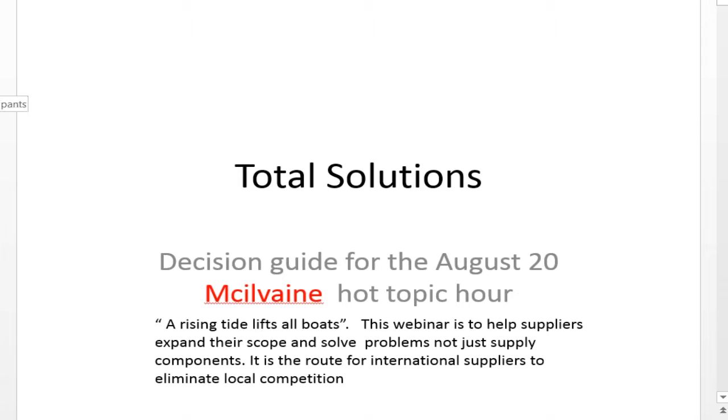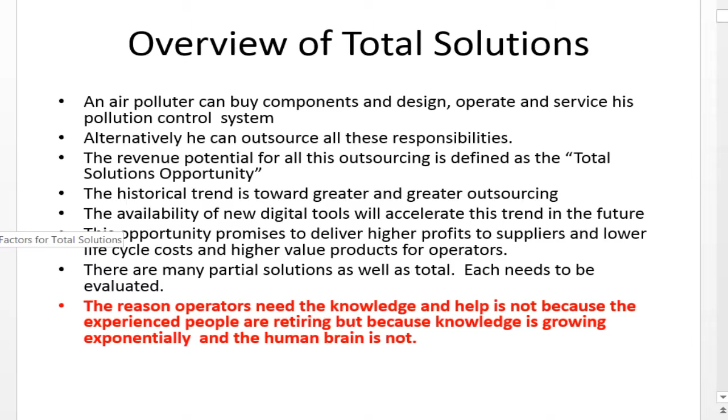Let's move on to the scope of the participants in the meeting today, which were a number of the suppliers and consultants in the field. This overview is available in various McIlvaine publications, including the power plant air quality decisions, the industrial air plants and projects, the scrubber and fabric filter market reports, and several others. So this short YouTube presentation is a short version of the actual 120-minute discussion, which has been recorded and is available along with the actual PowerPoint presentations that you're seeing here.

And there are many reasons that end users want more participation from the suppliers. Complex systems with multiple steps. So if you buy one component from one company and one from another, you may not get the combined results that you were seeking. Valuable products, and those are end products, but products along the way like refinery catalysts, challenging air permits, safety, health. Many of the air pollution systems now impact operations one way or another. There is a lack of skilled personnel within the plants.

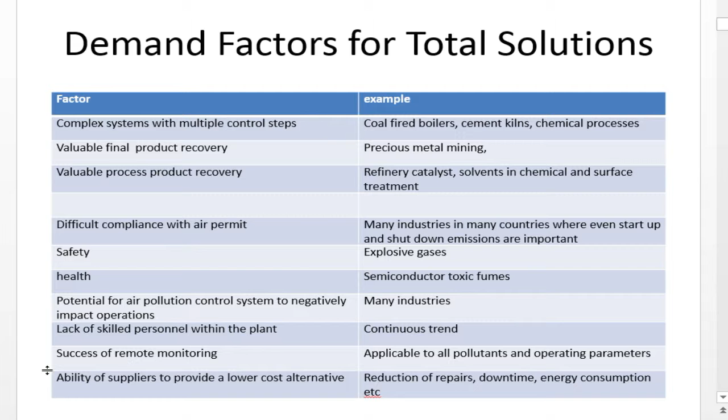Remote monitoring can allow the suppliers to create a lot of value to the end users at low cost. And the ability to even manipulate the repair parts and to provide the best repair parts in a particular area. So for instance, here Clarcor with Total Filtration Services can provide all the different filters that go into the plant and recommend improvements as well. And build, own, operate: one example would be providing systems that convert SO2 into ammonium sulfate fertilizer.

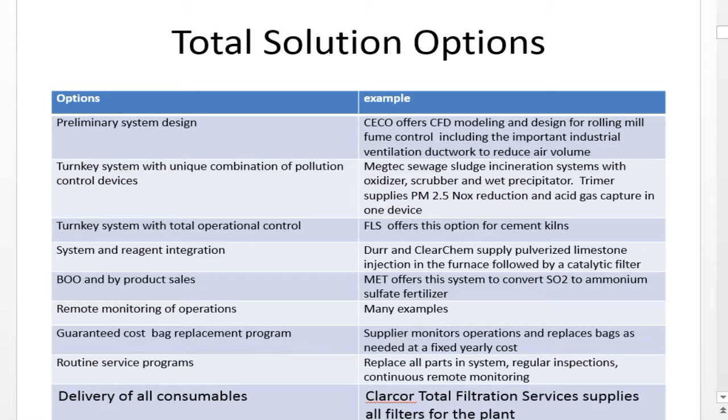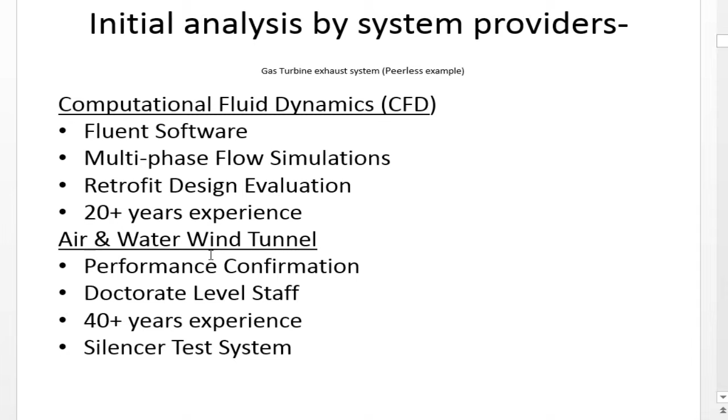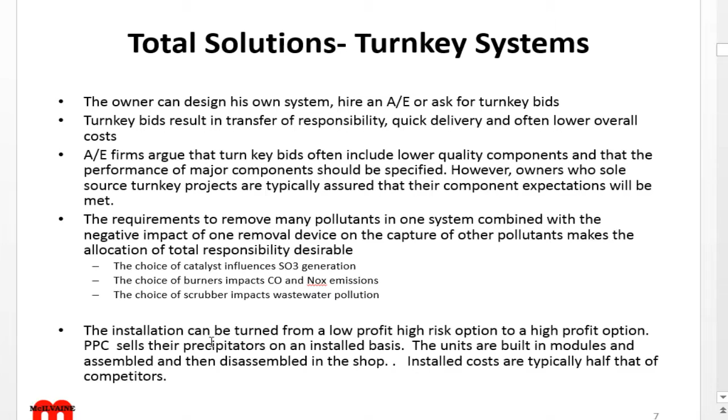A lot of the suppliers have the capability to analyze systems with air and water wind tunnels and other tools to make sure that the ultimate system which is installed has all the flow characteristics that are necessary. We can move on here, and for instance, one question is whether turnkey systems should be furnished by an EPC such as SNC-Lavalin or by the actual equipment suppliers. And in this particular case, SNC-Lavalin is also including the wastewater and a number of other pieces of equipment.

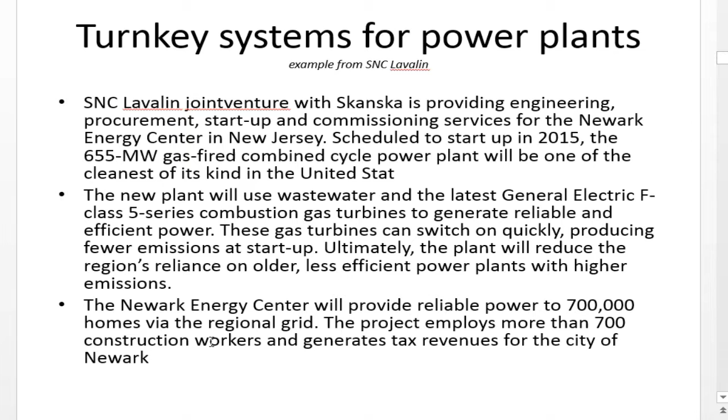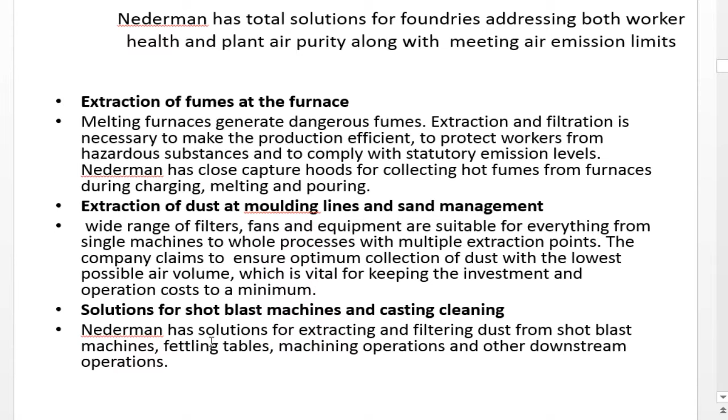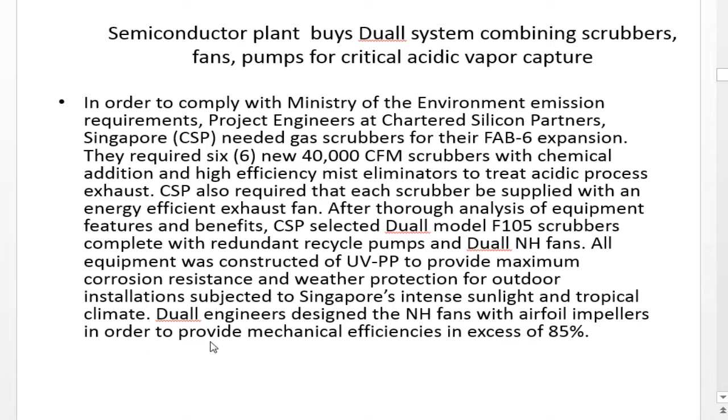It's important in many industries that the ventilation systems be married with the air pollution control, because a better job of extracting the minimum amount of air with the maximum amount of safety and health will translate into lower cost dust collection systems. The semiconductor industry is one example of where it's critical that the emissions be controlled for safety and health purposes.

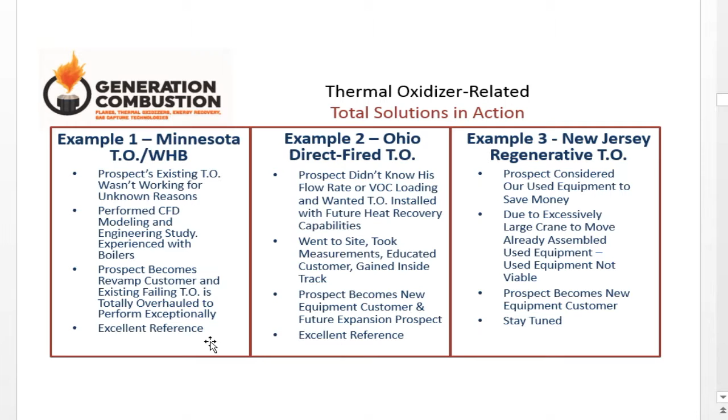Clark Griffiths, a consultant, explained all the different inputs that will be necessary for a successful installation, and suggests that even helping the customer determine whether to use used equipment or new equipment, trying to eliminate the use of excessively large cranes, etc., are all part of the potential. Mitsubishi and Air Products actually furnished a whole SO2 removal system on a build, own, operate basis, and the client only paid for the SO2 that was removed.

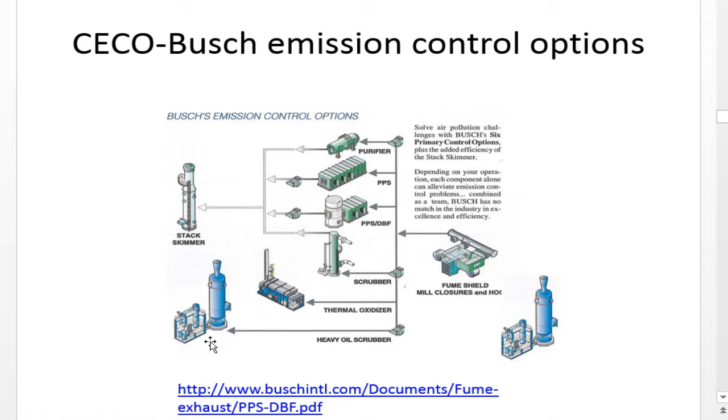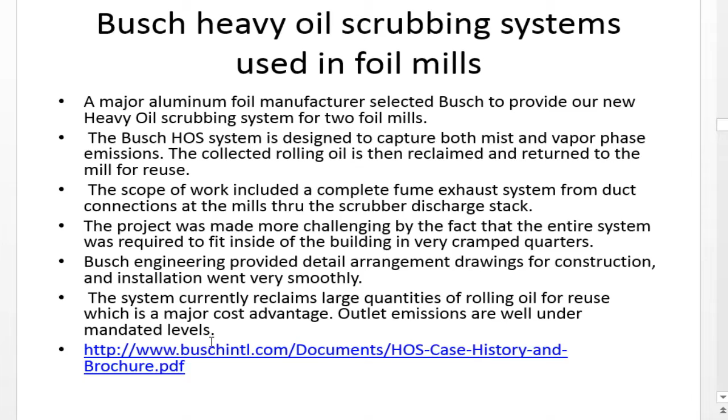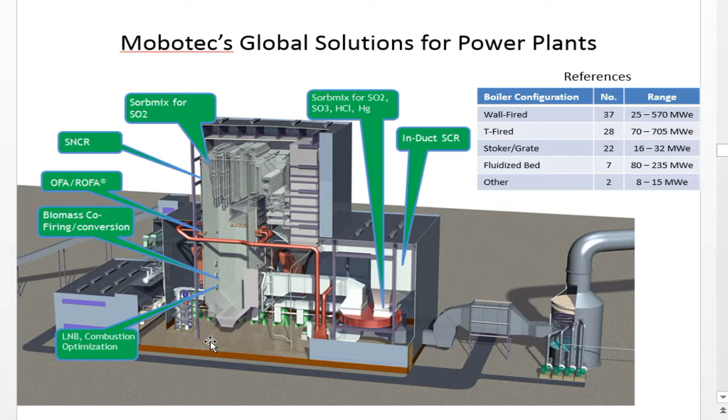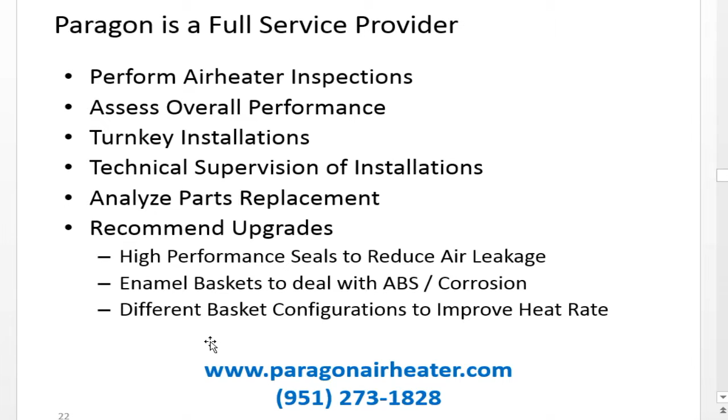Busch and MEGTEC have the options of providing systems that either combust the fumes or capture usable oils and solvents, and in some cases both give you the option at any point in time depending on the products that are being manufactured at the time. And Mobotec has the ability to optimize many of the in-furnace reactions that are going on and provide optimization there, and they can work with other suppliers. The air preheater is a critical device, and a lot of attention should be paid to that design.

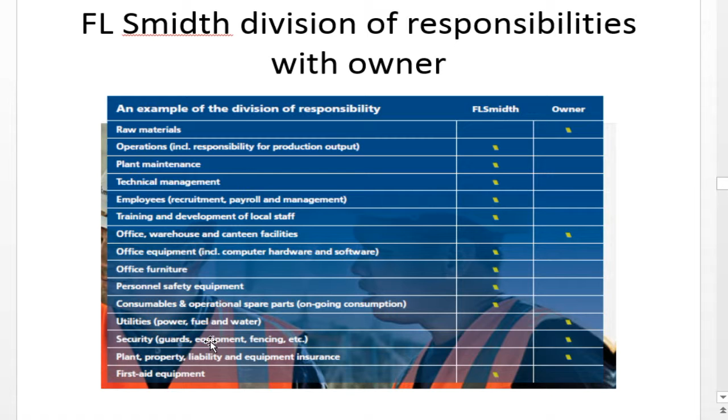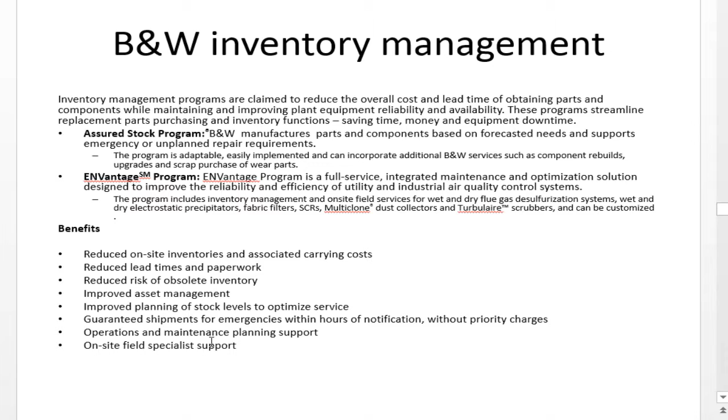FL Smidth builds, owns, and operates, so when it comes to operating plants, you can see here that even the first aid equipment is furnished by FLS in a cement plant, office furniture, so well beyond everything but the raw materials in the office and warehouse, and it can result in value to the customers. B&W is a good example of somebody who even furnishes the air pollution control equipment and can provide complete inventory management.

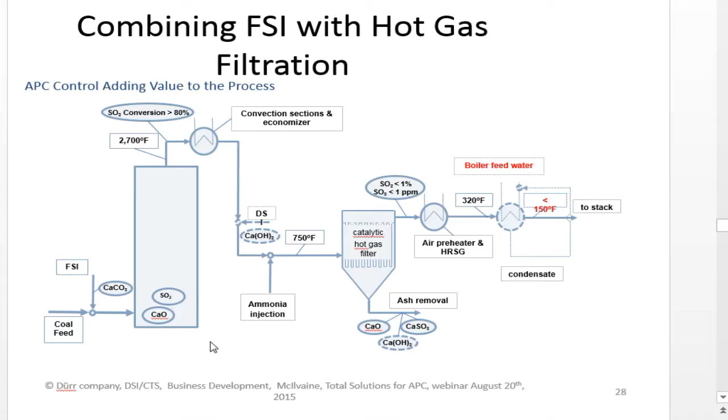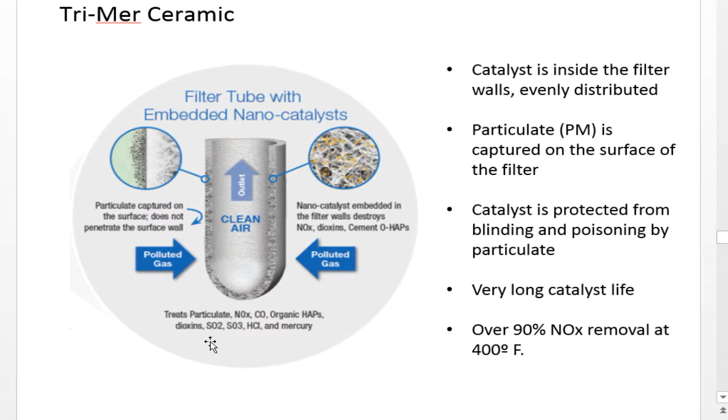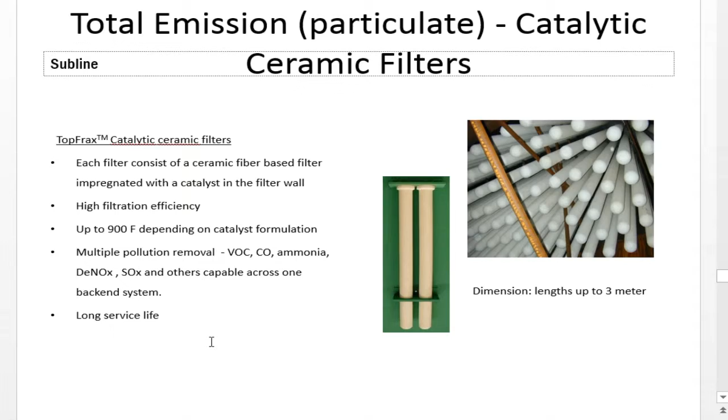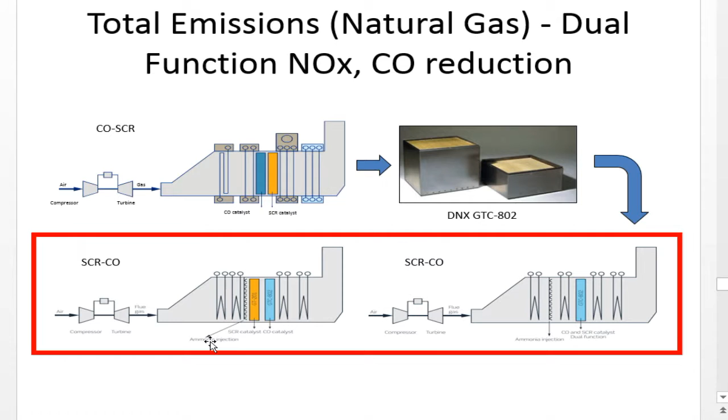Durr has a number of total solutions, including one where they use a unique powdered limestone sorbent, catalytic filters, air heat exchangers, and condensate capture to optimize the air pollution, the energy, and the byproduct recovery. Tri-Mer is another example, and both Tri-Mer and Durr are using these new catalytic filters. One of the suppliers of these catalytic filters is Haldor Topsoe, and both Haldor Topsoe and ClearEdge are producing catalytic filter elements that may last as long as 5 years or more. In both cases, you have options of not only removing NOx, but also VOCs and even CO.

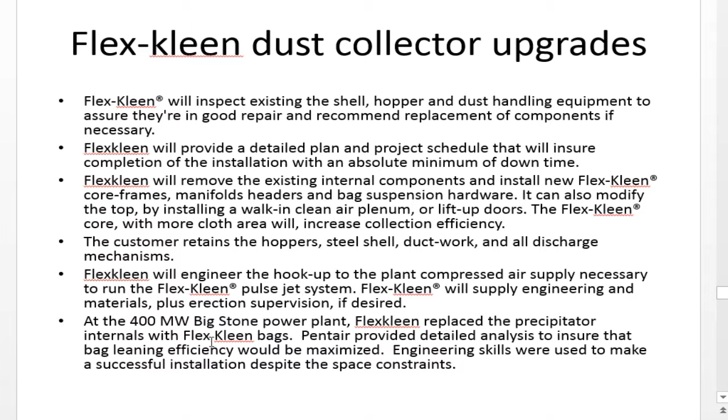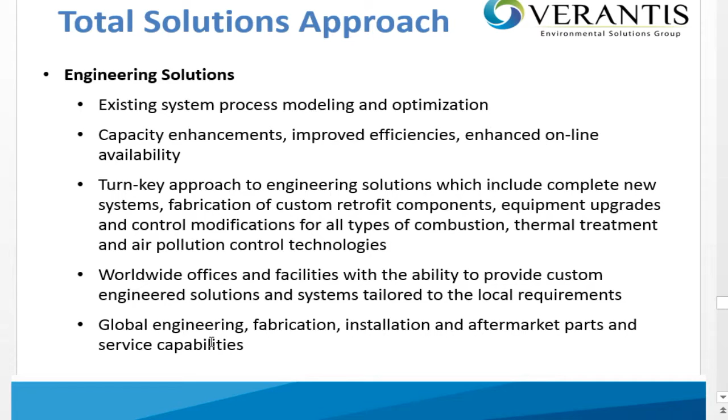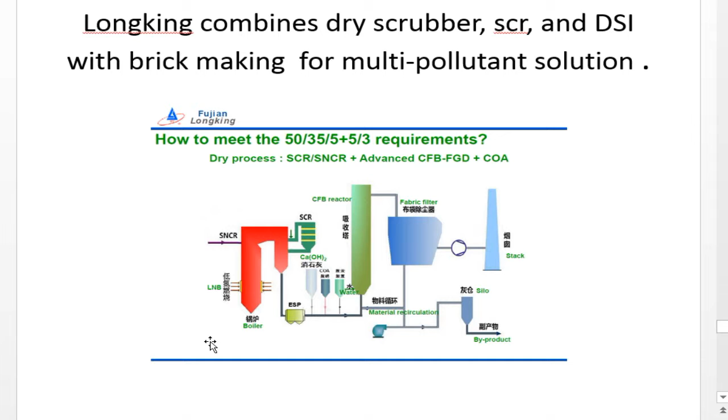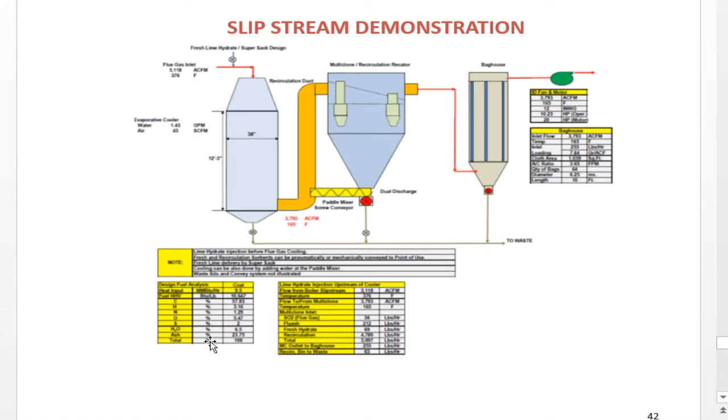Flex-kleen is one of the suppliers who can upgrade bag houses. Process optimization is something that is being offered by a number of companies. Verantis has zero liquid discharge systems and even product recovery with HCl and SiO2 and other products being recovered. Longking is making bricks from their dry scrubber systems while at the same time meeting the 50-35-5-5-3 requirements for SO2, NOx, particulate, and mercury, and the mercury is in micrograms. IAC has a new recirculation scrubber which allows you to use your existing precipitator.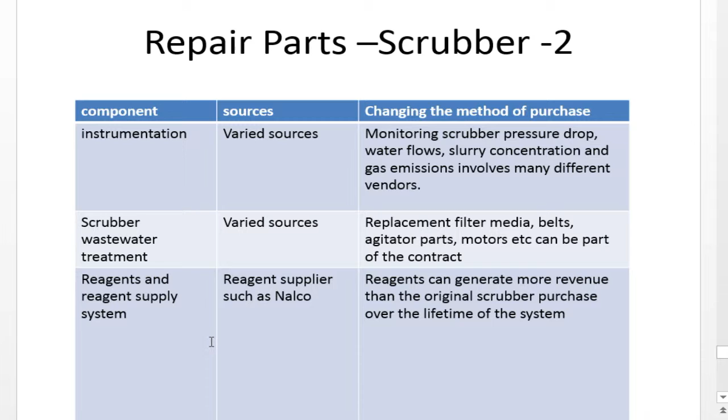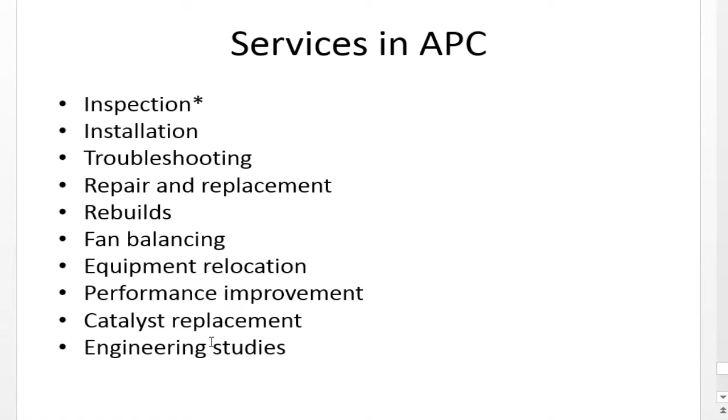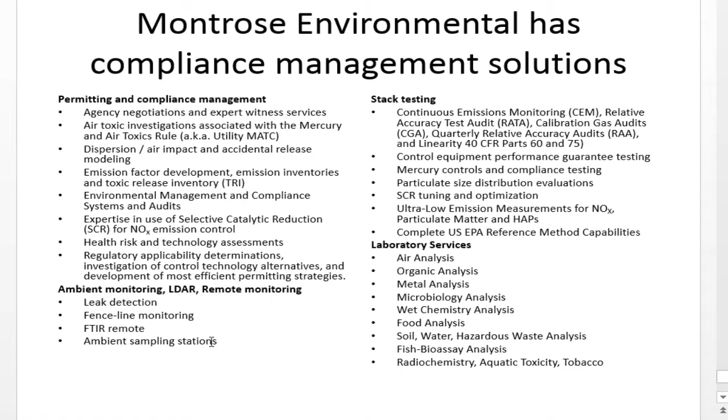The other considerations for suppliers are to furnish reagents in the wastewater, furnish nozzles, other products that traditionally have been purchased directly by the end user. There's a big potential for marrying the environmental measurement, compliance, and monitoring and stack testing laboratory services with turnkey systems for a seamless transfer from the initial supply of the system through the operation of that system. And last but not least, for many of these suppliers, there's a great deal of expertise in whole areas. So Sulzer has a static mixer that can be used in water and wastewater, but is also heavily used for making sure there's an even distribution of the ammonia in your SCR systems.

This is a very short coverage of a very important subject, and you can see the whole 2-hour webinar in a number of the McIlvaine